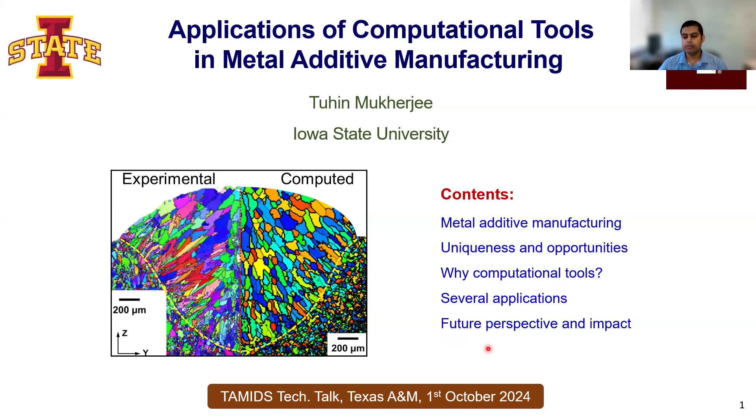This left-hand example, many of you may know. In 2014, in the International Space Station, they needed a wrench like this. But at that time, NASA didn't have any plan for a supplying mission. So what they did, they sent a 3D design of this wrench from Houston, Texas, very close to where you are sitting now, to the International Space Station. And in the International Space Station, they had a 3D printer that printed a fully functional wrench.

Even 10, 15 years ago, this could have been science fiction. But now, because of 3D printing, it's happening in reality. And if you see, the application of metal additive manufacturing is in diverse industries, starting from aerospace, consumer product, energy industry, medical industry, so on and so forth.

Then what is the problem that we are going to talk about today? The main problem is, if you are from metallurgy, you know that there are over 5,000 commercial metallic alloys. And how many of them can we print today? You can probably count with both of your hands. That few.

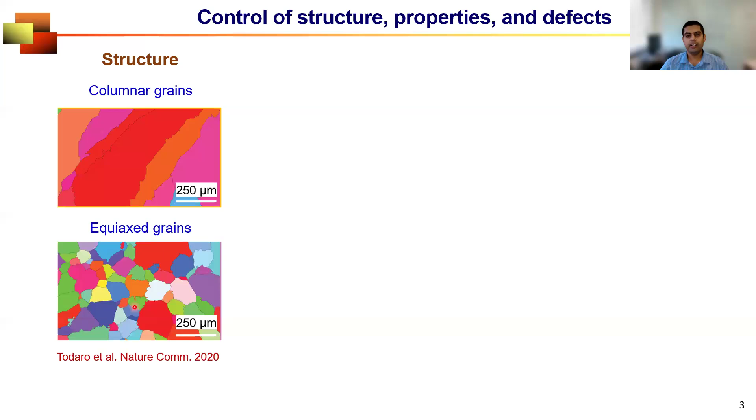When this kind of part is under tensile loading, two consecutive grains may start separating from each other, leading to failure of the part. But that's not the case when you have very small grains that will provide enough strength preventing failure. So you see that depending on how you are printing, your microstructure looks different, and that will result in very different mechanical properties. In the same part, depending on the location inside the part, the mechanical property can significantly vary.

For example, you see with the distance from the top of the deposit, the hardness varies significantly. And that is also attributed to the difference in the microstructure. And finally, a wide variety of defects—starting from lack of fusion voids, porosity, cracking, surface roughness, distortion, so on and so forth—all of these can significantly degrade the mechanical properties, serviceability, performance, and reliability of the part.

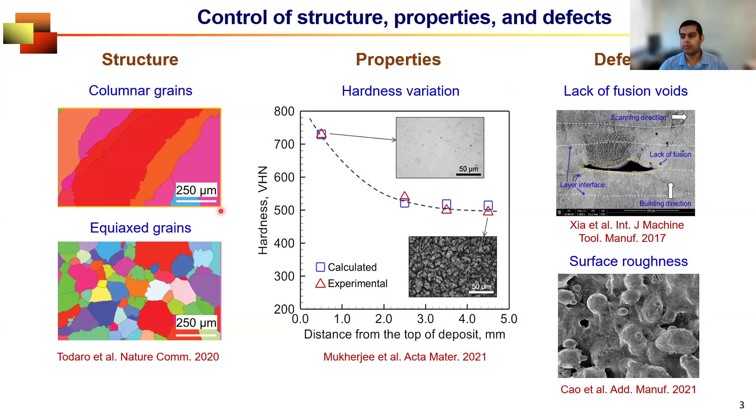And when we spend a lot of money in 3D printing a part by using a $1 million expensive equipment, then we do care about our part. We don't want to print and throw that part away. So that's why controlling all of these things is really, really important. And that's where the computational tools can help us.

Let me give you a quick example. If you do a metal 3D printing, these are the variables that you can adjust.

Like for example, power, speed, laser beam radius, layer thickness, and there are many variables that are process conditions or properties of materials. Now, there are 12 in this list, and if you use a very simple two-factor design of experiment, the minimum number of experiments that you need to fully capture the effects of all these variables is 2 to the power 12, which is 4096 experiments.

Now, if you do 3D printing, you know how challenging 3D printing experiments are. So let's assume that you do one successful experiment a day. A PhD student cannot graduate in 10 years.

So that's the issue. And if you just take two process parameters, laser power and scanning speed, you see for the same material, the power and scanning speed vary depending on which additive manufacturing process you are using. Please note that both of them are plotted in log scale. So that means you need to explore such a wide range of processing conditions to be able to fully explore the effect of processing conditions and to understand and correlate those with microstructure, properties, and defect formation.

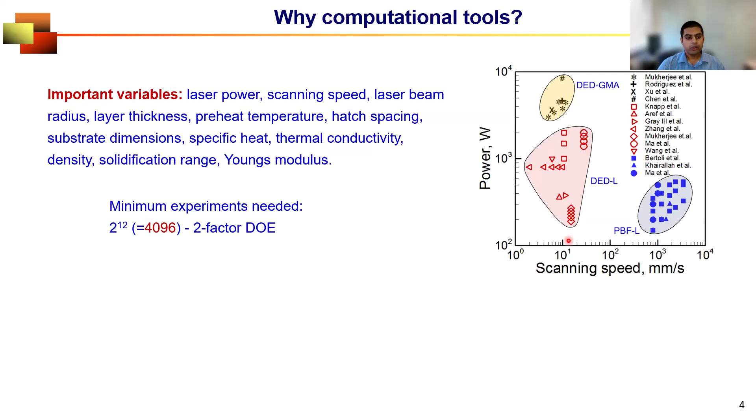To do so, we can take advantage of computational tools that can virtually test this process parameter window and reduce the parameter space for experiment. So it can tell what works and what does not work so that you don't waste material, energy, and time in doing experiments that are not fruitful. In other words, it will minimize trial and error, improve quality, and at the end, reduce money.

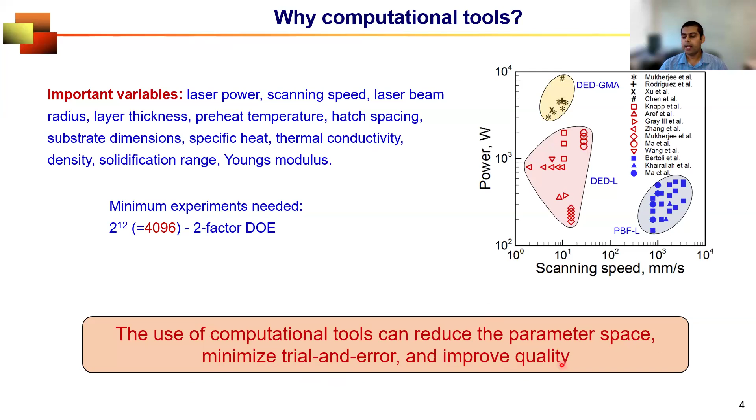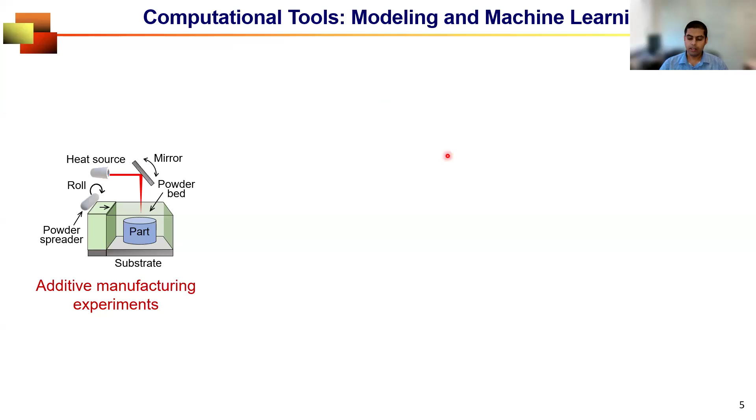So what do I mean by computational tool? It can include multiphysics modeling as well as AI tools such as machine learning and deep learning. So how do they help? Mechanistic modeling calculates the variables that affect the three things I was talking about by providing scientific insights. And it can guide experiments by providing the appropriate conditions for which we, let's say, get a defect-free part with appropriate microstructure and properties.

But development of these models depends on proper understanding of the science behind the additive manufacturing process. Now, additive manufacturing is a rapidly emerging process, and for many cases, we do not understand the physics completely. Then what we do is take advantage of the wealth of data that we generate every time we run the model or every time we do the experiment, and synthesize those using machine learning to obtain understanding that we cannot obtain

from mechanistic modeling. And these days, machine learning algorithms or deep learning algorithms have improved so much that they can provide reliable prediction with less data. And most importantly, since we are talking about a multivariable problem, machine learning can also guide us to understand which variable is less important, which variable is more important, so that engineers can know which variable to control to be able to tune microstructure, properties, and defects.

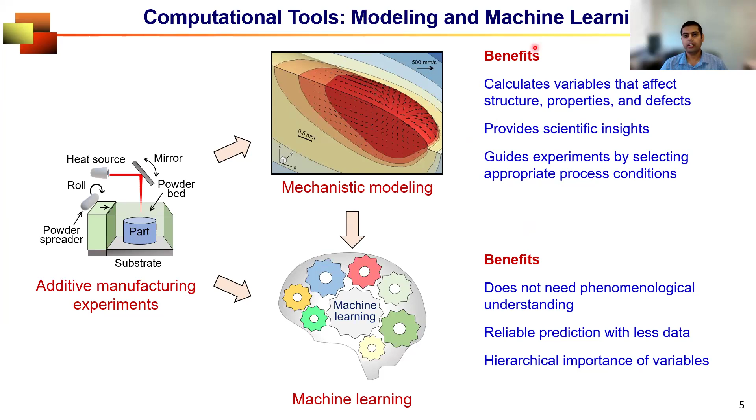So at Iowa State, we do a wide variety of things in both domains, modeling and machine learning. Let's start talking about the modeling. The most primitive model that we do is a reduced order analytical model. It has a lot of approximations to accelerate the computational speed, but it can give us essential information on which microstructure, property, and defect depend on, like, for example, the temperature distribution or the dimensions of the molten region.

So this is an example of laser-directed energy deposition additive manufacturing, where you see a very primitive reduced order analytical model can more or less predict the molten pool or deposit dimensions within

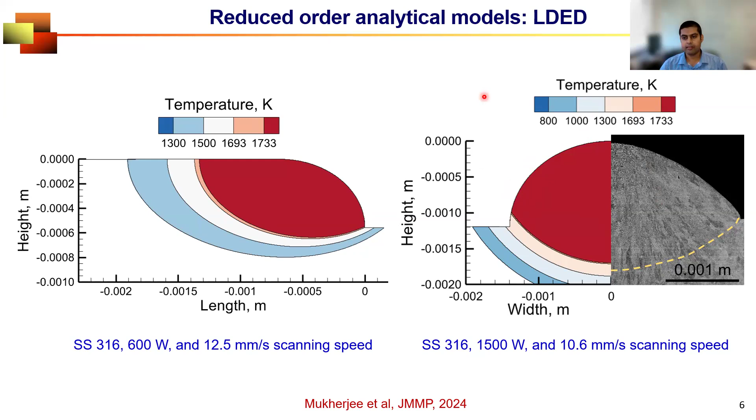So the advantage of these types of analytical models is they can not only provide useful insight into this process, but they can also be used for comparing different alloys in terms of their fusion zone geometry, cooling rate, evolution of microstructure, susceptibility to defects, printability, and so on and so forth.

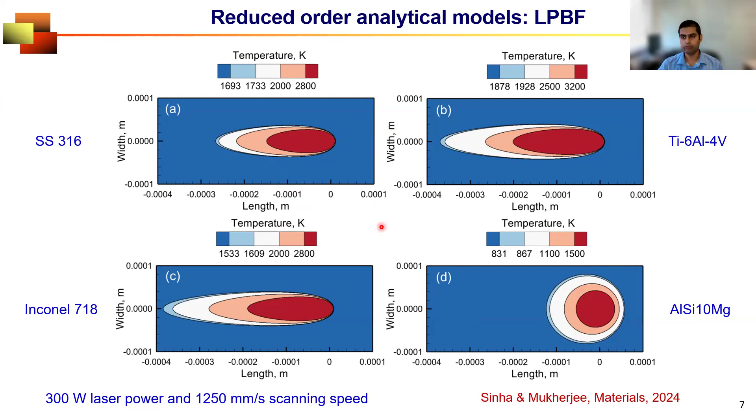Now, if we add a little more complexity and develop numerical models—why? When we need to understand more in-depth knowledge about the additive manufacturing process. For example, when we create a molten region, how does that molten metal flow inside that region? When we create a molten region, depending on the temperature difference, there will be differences in density and differences in surface tension. All of those drive the convective flow inside the molten region.

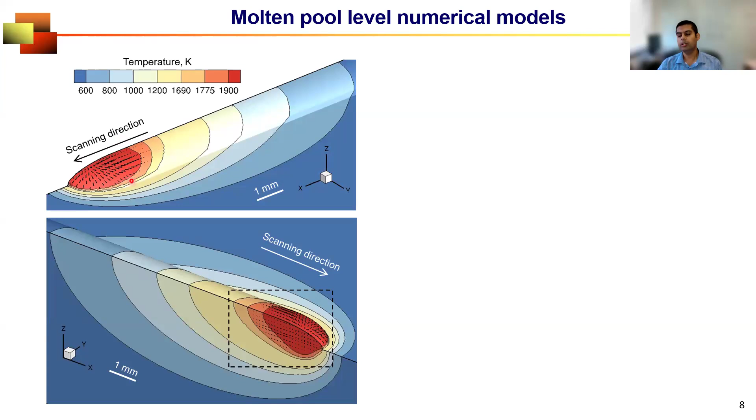These convective flows not only affect the dimension of the molten region, but the temperature in the nearby region, and thus the evolution of microstructure. This type of in-depth numerical model can provide us a very detailed picture of what's happening during the additive manufacturing process. If you look at the scale bar, this is 0.5 millimeter, meaning this is something like 5 millimeters long. So whatever is happening is within a very small, tiny domain, and we are capturing detailed physics within that tiny domain.

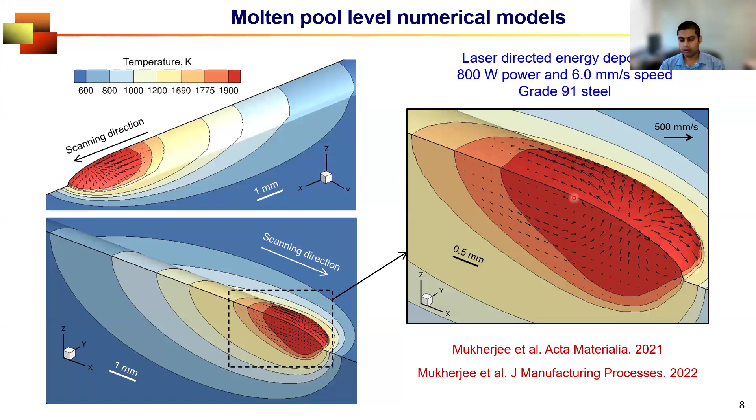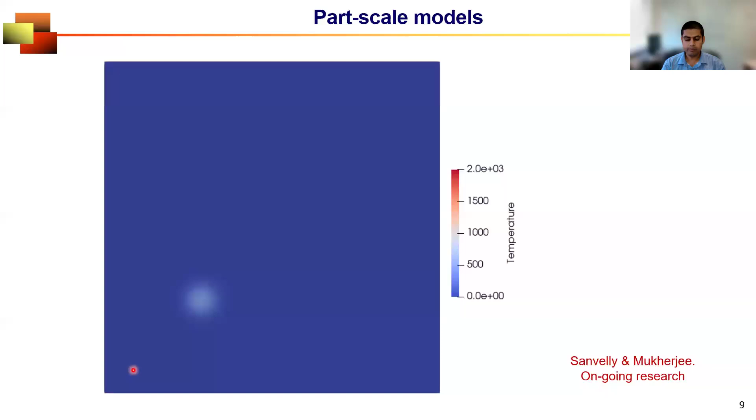Now, we know that we make additive manufacturing parts by depositing many layers and hatches, thousands of layers and hatches. So what if we want to simulate the entire part? That's often very difficult with such an in-depth model, for which we develop a part scale model that does not consider so much what's happening inside the molten pool, but is much more interested in looking at the entire picture. Let me play this animation so you understand what I'm saying.

For example, the laser beam in laser powder bed fusion is moving in a zigzag pattern, and this model is successfully capturing the variation in the temperature field happening across the entire part. That means for the entire part, depending on where we are looking, we can accurately predict the temperature fields and their spatiotemporal variations.

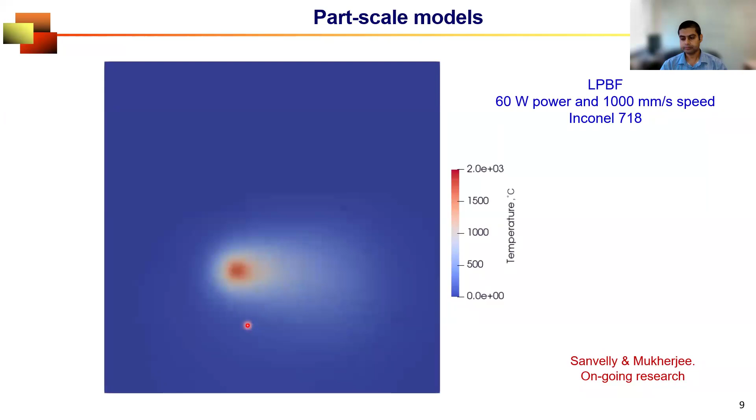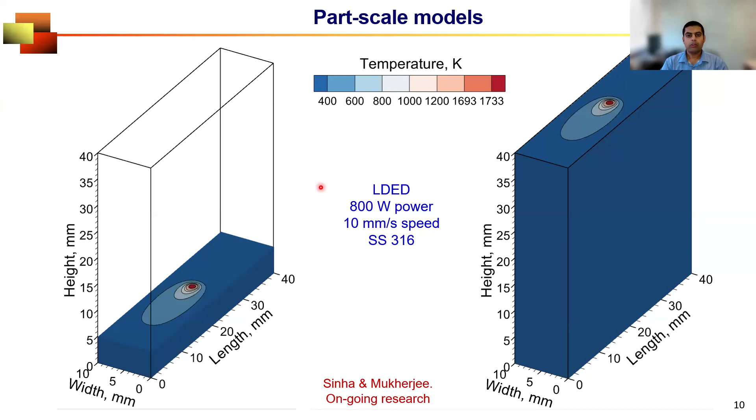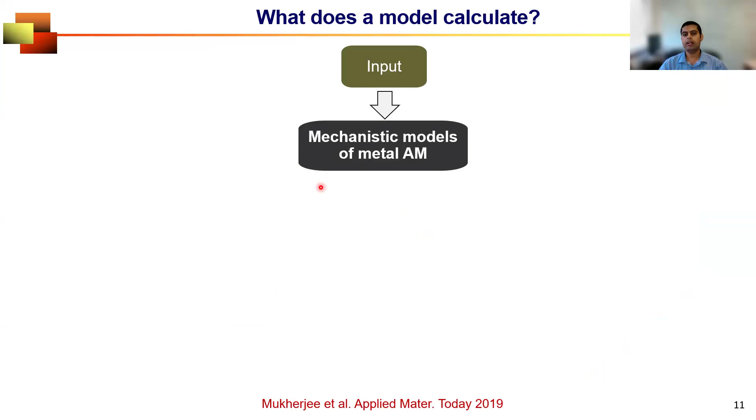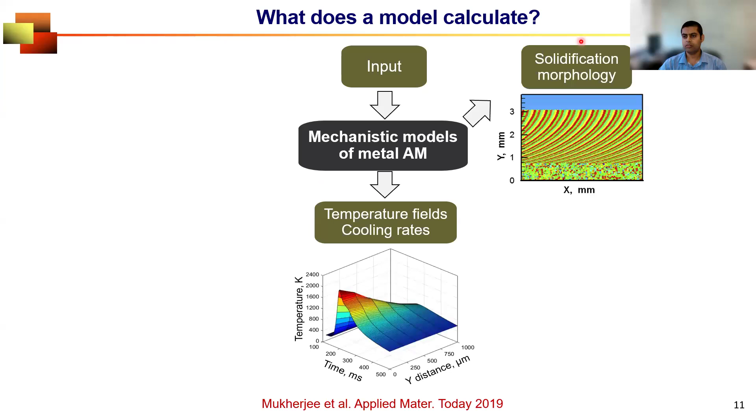So from the part scale model, if we go forward and try to understand the needs—whether it's a reduced order model, a much more in-depth numerical model, or a part scale model—the main objective is to get the temperature fields and cooling rates. Once we know those, we can take advantage of that information to get solidification morphology, whether columnar grains or equiaxed grains, or a complete 3D grain structure, not only giving you the grain size but its grain size distribution in 3 dimensions, and also residual stresses and a wide variety of defects. This is the overall objective and the main mantra of developing a wide variety of mechanistic models for additive manufacturing processes.

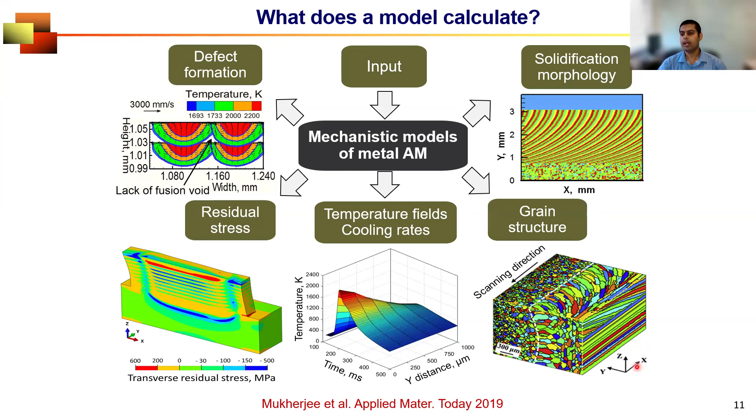Now, if we look at where machine learning can help in additive manufacturing, to me there are two types. Like all other machine learning applications, for additive manufacturing we can classify all the problems we want to address into two classes: regression problems and classification problems.

Under regression problems, the examples are like control of geometry—whether we are making a larger or smaller molten region, whether the grain size is very big or small because they affect properties, how much residual stress we are accumulating, what is the amount of distortion in those parts. Those are regression problems where we talk about the particular value of a variable.

In contrast, in classification problems we talk about 2 or multiple classes, like whether our part has a porosity defect or is defect free, whether it has a crack or is crack free, whether the solidification morphology is columnar or equiaxed. So it's a classification problem. Depending on these two types of problems, we use different machine learning algorithms, like any other application of machine learning.

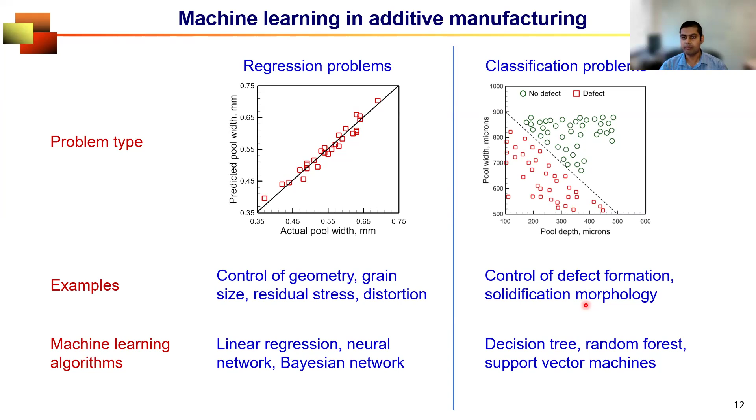So now, in subsequent slides, I'm going to give you 7 examples of the use of modeling and machine learning in additive manufacturing that we are doing at Iowa State.

This example is very close to my heart, and the picture I'm showing is actually in the building where I'm sitting, in my lab. We have a wire arc additive manufacturing system controlled by a cobot, or collaborative robot. What it does is deposit material in the form of wire, which is melted by a high energy electric arc—just like this, the electric arc is melting the metallic wire—and that is being deposited layer by layer, making the part in 3D.

This is my student wearing all the PPE, observing very closely what's happening in real time.

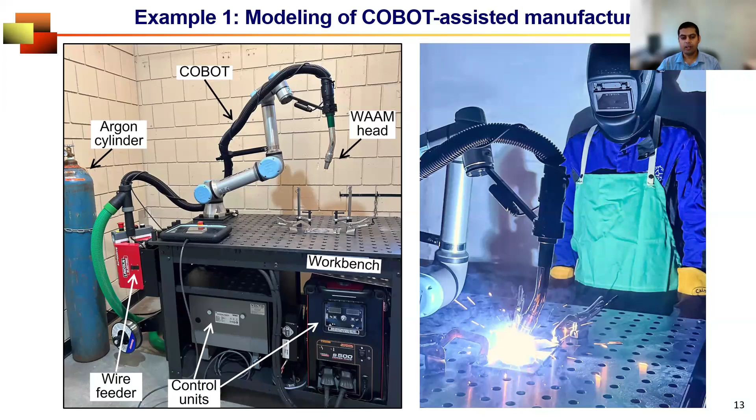Collaborative robot, or cobot, is much better than traditional robot in many cases. For example, it reduces the need for path programming, enhances the safety of human interaction, and improves user friendliness and productivity. Because of these, it's particularly useful for additive manufacturing.

As you see my student doing, you do not need to program this robot explicitly. Instead, you can teach the robot a path along which you want to deposit material by selecting a few important coordinates, and the robot itself will identify the deposition path and 3D print the entire part.

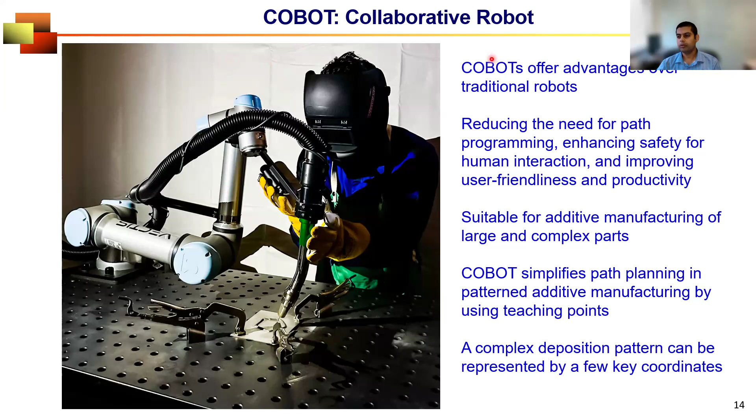Here we model the additive manufacturing process using a collaborative robot. I can give you one quick example: we deposit material following a hexagonal pattern, and the cobot needs to be programmed just based on the 6 vertices of this hexagon.

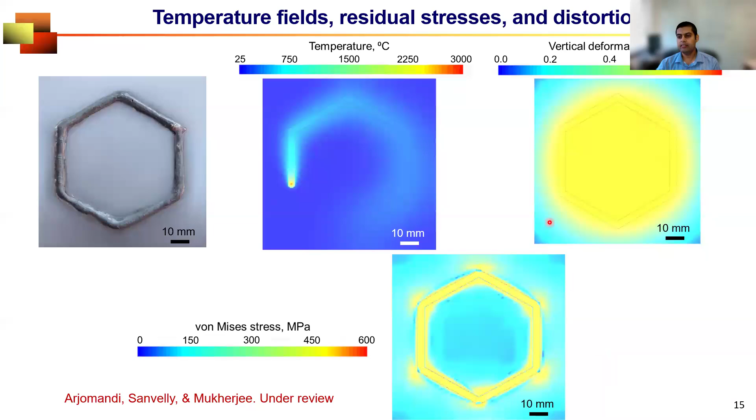You can see the corresponding temperature calculation using a part scale model, the deformation calculation, and stress calculation, all using part scale model because here we are talking about large length scale. The part scale model gives you the essence of the process itself, where the stresses are accumulating the most, how the part is distorting in 3D, all those detailed information.

The second example is consistent with one of our objectives: structure, property, and defects. It's on controlling grain structure. If we go back to our metallurgy class, we are taught that during solidification of an alloy, there is a two-phase region, solid liquid region. When the liquid is being solidified, not all liquid instantaneously becomes solid; there is a two-phase region, liquid and solid.

If you plot the temperature in that region, you will see two things: one is actual liquidus line, and the other is the equilibrium liquidus line. The difference between these two is called supercooling. For all solidification processes to happen, there has to be a supercooling that drives the solidification process.

This temperature difference is very important, because this temperature difference divided by distance, called temperature gradient, represents whether we will form columnar grains or equiaxed grains. This is a very well-known plot from metallurgy books, where people plot this temperature gradient, which is temperature difference divided by distance, the slope of this line, with respect to growth rate. Growth rate means how fast this solidification front is moving, the rate of solidification.

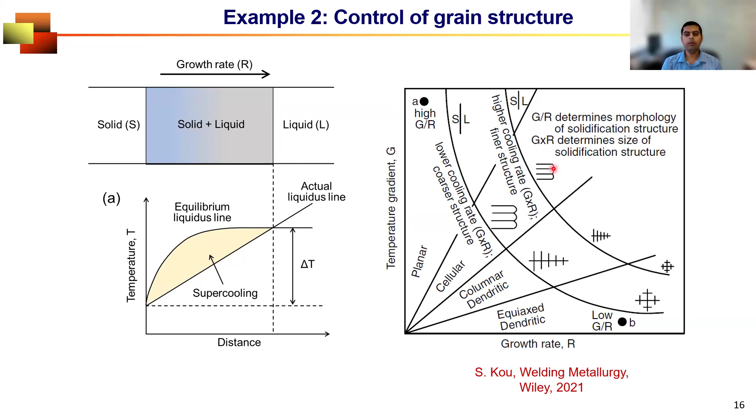Now let me give you examples of both of these. Here we have used a model to calculate the G by R ratio for an aluminum alloy, 6000 series aluminum alloy. The calculation shows that this G by R ratio, which is the slope of the previous plot, is varying spatially like this.

We know for this material there is a critical G by R value that determines whether it will form columnar grains or equiaxed grains. For example, if the G by R ratio is more than 9, it will form columnar grains. If this is less than 9, it will form equiaxed grains.

Now you see this is the computed value of G by R. In this region, the value is less than 9, and they should form equiaxed grain, which is proven here from the model as well as from the experiment. Beyond which, the value is more than 9, meaning columnar grain. You see long columnar grains being formed, which is also evident from the experiment.

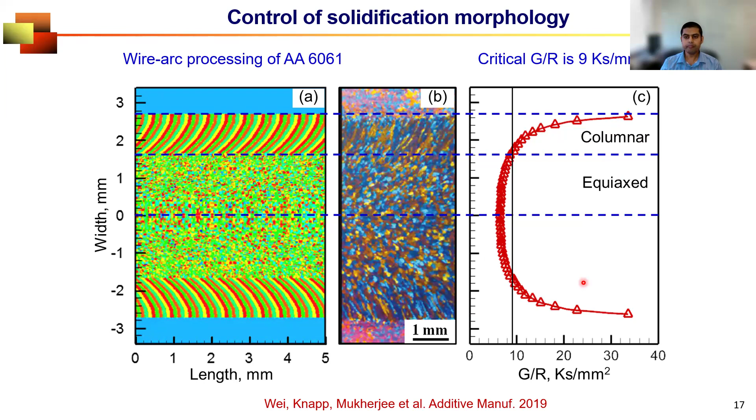This gives you a very good example of how you can take advantage of temperature calculation and process it to get useful scientific insight to predict microstructure. So this is about the morphology. The next thing is about the size.

If I go back once again to our phase transformation class, we often talk about primary dendrites and secondary dendrites. For non-metallurgists, they look like Christmas trees, but that's how solidification happens. The distance between two consecutive primary dendrite arms, or between two consecutive secondary dendrite arms, significantly contributes to the mechanical properties of the part.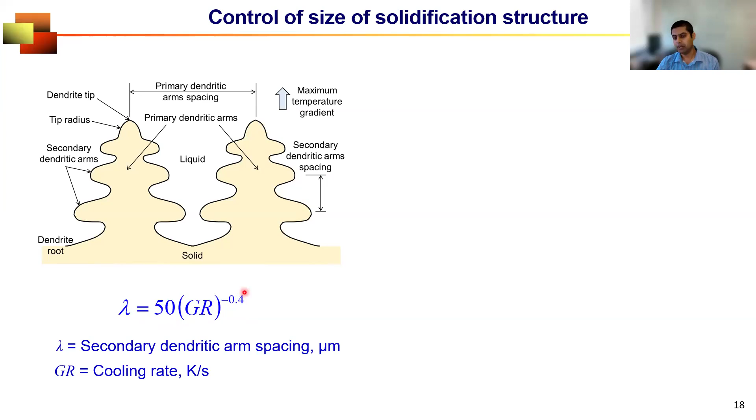Secondary dendritic arm spacing, which is this distance, is related to the cooling rate using this formula. Now 50 and 0.4 are alloy specific constants. For steel, this is 50 and 0.4. If you are taking aluminum alloy or nickel alloy, they might be different.

So once you have these and calculate the cooling rate from the temperature field, you can calculate secondary dendritic arm spacing. You see here for different laser powers how we can calculate the secondary dendritic arm spacing that is matching with the experiment. For low power, you see smaller dendrites, and for high power, you see larger dendrites, which is very consistent with the calculated results.

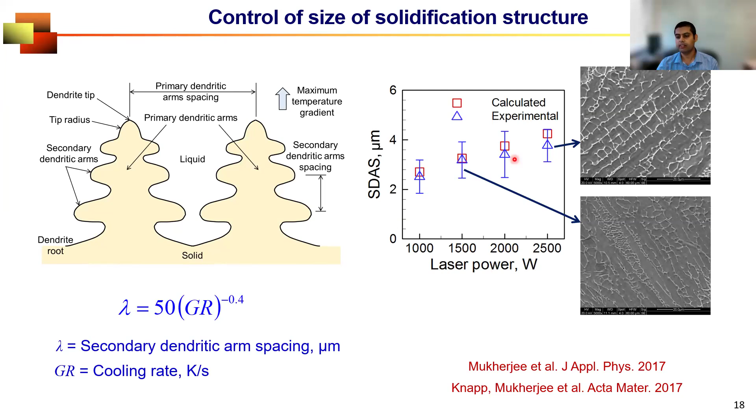So now, since we have talked about the microstructure, the next example that I selected is for controlling one of the very primitive mechanical properties, which is hardness. The example is for a ferritic steel whose hardness is affected by martensite.

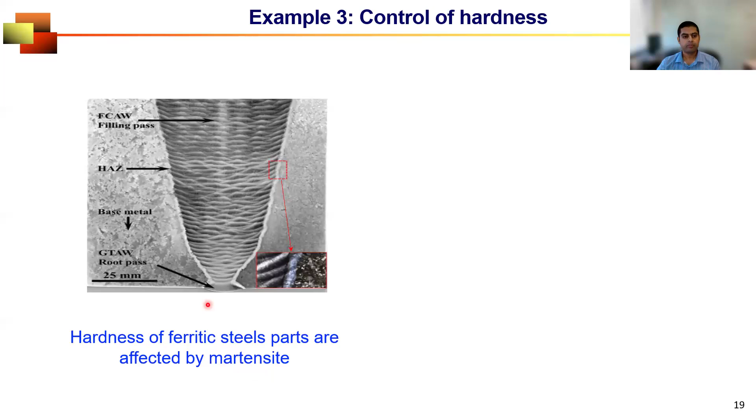Often we weld or additive manufacture this type of part by using multiple tracks. Here we are talking about a ferritic steel, grade 91, that is used for the nuclear power industry. This is a famous transformation diagram.

You can see that martensite forms for this particular material at a very low cooling rate, 0.05 Kelvin per second. In additive manufacturing, what is the cooling rate? It's like 10 to the power 3 to 10 to the power 5 Kelvin per second, depending on processing conditions. So this is guaranteed that whenever you process this material using additive manufacturing, you will end up having martensite. And this martensite will control the hardness of the part.

But there is a small catch. We make additive manufacturing parts by depositing many layers. That means the layers already deposited will undergo repeated heating and cooling. And that repeated heating and cooling changes some of the martensite to tempered martensite. Hardness of tempered martensite is less than martensite.

So that means depending on how many times it's getting reheated and cooled, the extent of tempered martensite formation will be dependent on that, and hardness will accordingly change. So how to model that?

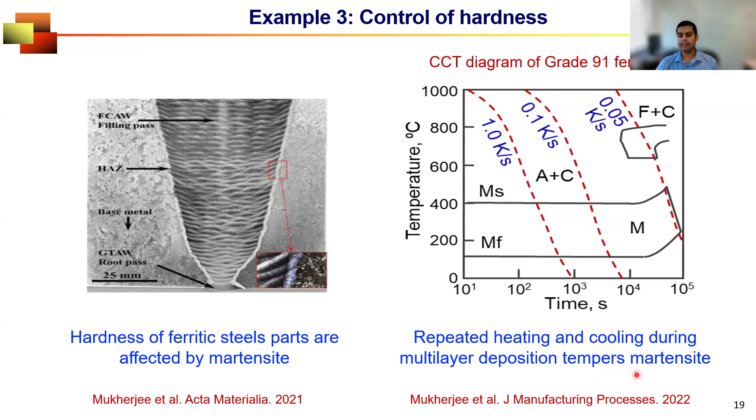What we did, we used the isothermal aging data. Now, for a complex material system like grade 91, it's very difficult to get reliable data on isothermal aging. So what we did, we collected a lot of data from the literature and then used that data to train a neural network, and then used that neural network to generate a lot of tempering data for different time and temperature combinations.

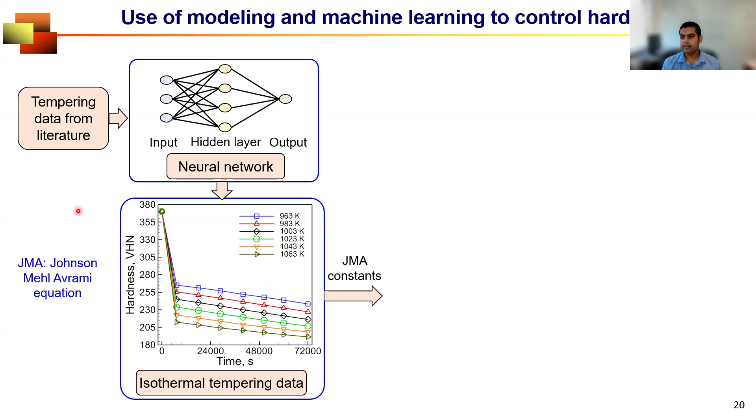Once we have that, we get the constants in the Johnson-Mehl-Avrami equation. What's this equation? It's a very famous equation for capturing isothermal phase transformation. On the other hand, the model I was talking about can give you the temperature variations with time, multiple thermal cycles, repeated heating and cooling due to deposition of multiple layers and tracks. Now, the JMA equation is an isothermal phase transformation equation.

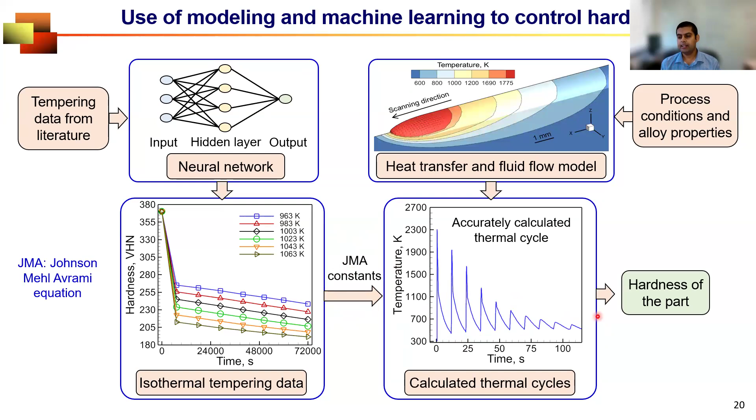So what we need to do is take that and integrate over the temperature variation with time. And that will give us the tempering kinetics as well as the hardness of the part. And it looks like this.

Hardness is plotted for grade 91 steel part made by laser directed energy deposition with respect to the distance from the substrate. You can see that near the top, the hardness does not vary significantly, but down below, it varies linearly with the distance. This phenomena, observed both in experiment and in calculation, can be explained by using the model.

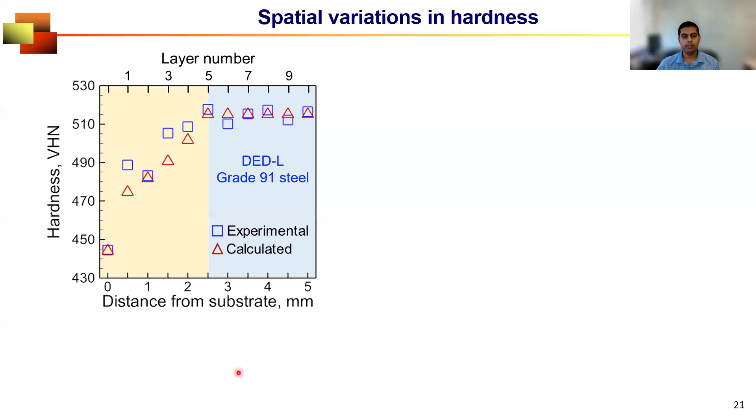For example, near the bottom region, you see that the peak temperature is going below the AC1 temperature. What is the AC1 temperature? AC1 temperature denotes the region between austenite and martensite. So if you think of the phase diagram of steel, that's the important temperature we often talk about. The transformation from austenite to martensite will be valid only if the temperature is below this AC1 temperature.

But you see, for this case, for the first 4 cycles, whatever martensite it forms goes back to austenite because the temperature goes beyond 1100 degrees Kelvin. But after some time, the peak temperature is not going beyond AC1 temperature, and whatever martensite it forms undergoes repeated heating and cooling, and that martensite transforms into tempered martensite. That's why the hardness is less than in the top region.

What's happening in the top region? The peak temperature never goes below AC1 temperature. So the martensite that forms here will transform again back to austenite. This martensite will never transform into tempered martensite. That's why the hardness in this region is controlled by the absolute amount of martensite, not tempered martensite.

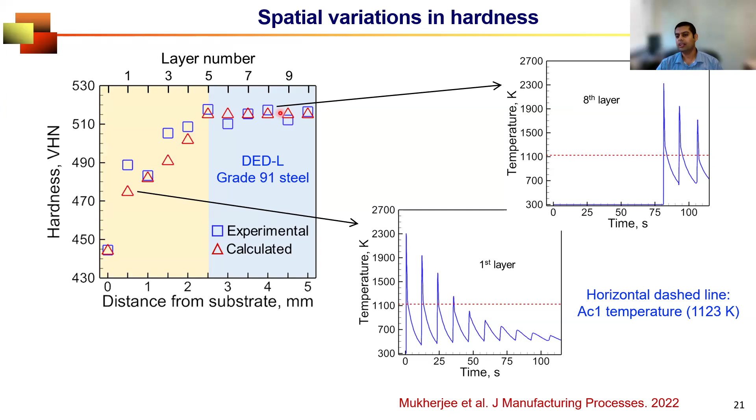So the fourth example, after structure and mechanical property, now we are going to the defects. Examples 4, 5, 6, and 7 will be focusing on defects, different types of defects.

So the first one is reducing porosity. There are 3 different types of porosities that we encounter during the additive manufacturing process.

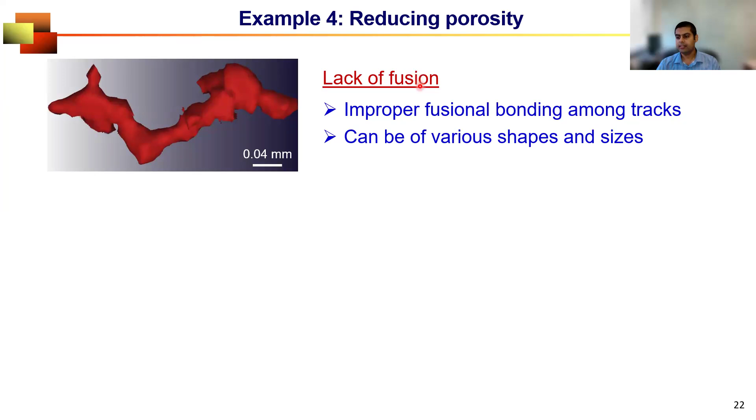First one is lack of fusion. What do I mean by that? We deposit multiple tracks. What if they do not properly fuse with each other? That will end up creating a lack of fusion defect.

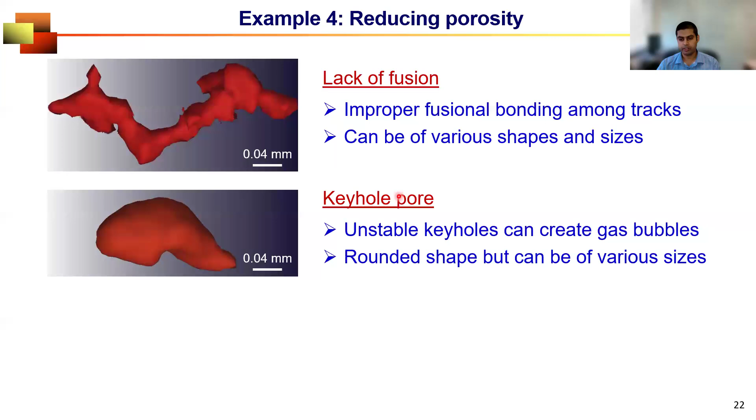Second, often we perform additive manufacturing in keyhole mode. What do I mean by that? The energy density is so high that it forms a vapor cavity during the process. If that vapor cavity or keyhole is unstable, that will break and generate a lot of gas bubbles that will end up creating porosities. The third one is gas porosity, where the shielding gas or metal vapor are trapped within the molten region and create porosity.

You can see they vary widely in terms of their shape, size, and morphology. So here I'm going to talk about lack of fusion and gas porosity.

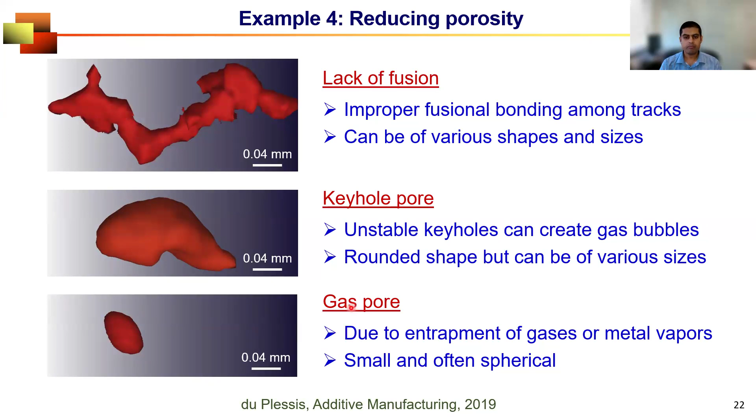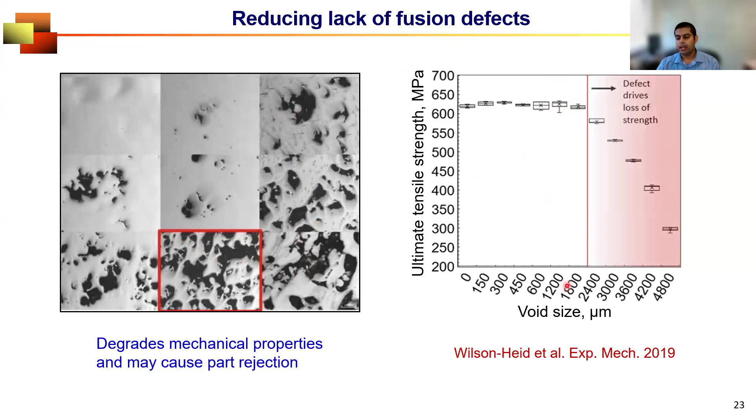So like all three types of porosity defects, the lack of fusion defect, which is represented by improper fusion among tracks, significantly deteriorates the mechanical properties. As you can see, the ultimate tensile strength decreases very rapidly with the size of the void.

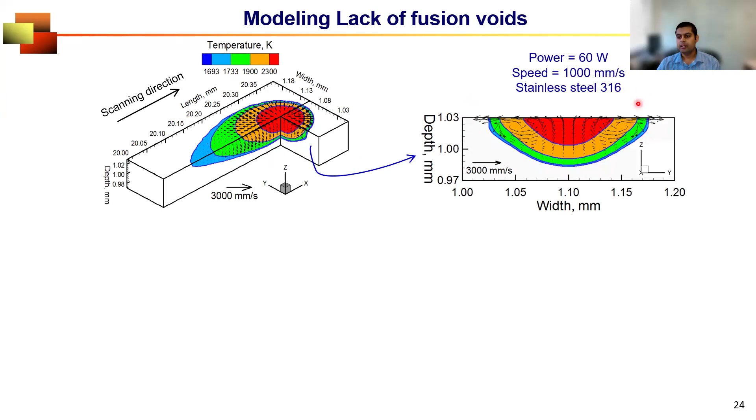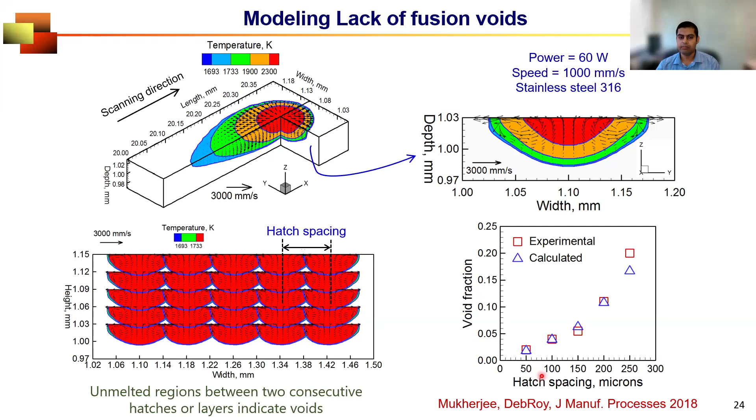Now, if you have all these variables calculated using an additive manufacturing model, we can even get a linear regression model and propose an index that can delineate between porosity cases and cases where the porosity is very low. That's the advantage of combining modeling and machine learning, to identify important scientific insights to solve such a complex problem like porosity defect in additive manufacturing.

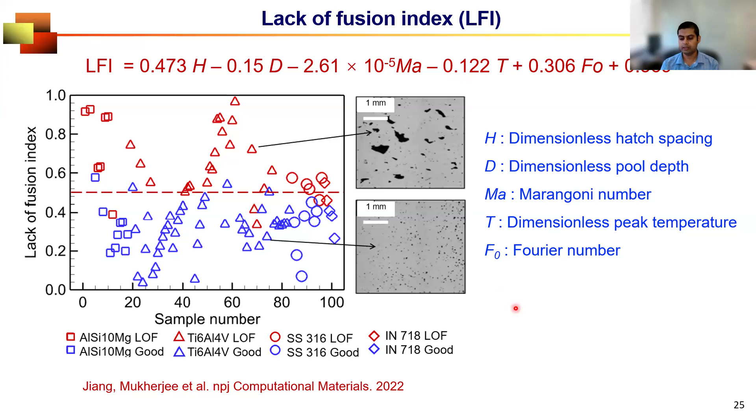So the other type of porosity is called gas porosity. Now, there are two times that are important: time to rise, and time to solidify.

What are they? Let's imagine this is the molten region and we have a gas bubble. Now, this gas bubble, since its density is less than the density of liquid, because of buoyancy, this gas bubble will try to float up, rise up. Now, before it can rise up and escape from the molten pool, if the molten pool solidifies, then it will be trapped and cause porosity.

So then the time it takes to rise up, time to rise, and the time the molten pool takes to solidify, both are important. If time to rise is significantly higher than time to solidify, then definitely you are going to form porosity.

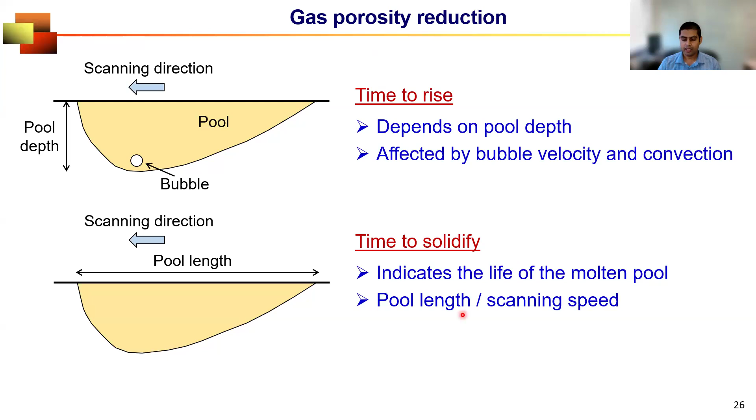So what we did, we tried to calculate these 2 times in additive manufacturing and tried to come up with their ratio, and propose a dimensionless index. What we found?

Depending on the index, we can classify the cases where we see porosities and the cases where we do not see porosity. We have about 100 experimental cases for 4 different commonly used materials, and these 100 data points are collected from the literature, different papers that are available.

And we see that no matter what process parameters we are using, at the end, a simple time ratio can delineate the defect-free cases from the defective cases. And when we have a defect, the index is also useful to represent the density, or 1 minus porosity, very accurately. So here, this is another great example where a simple temperature field and molten pool dimension calculation can give you important insight to solve very important problems.

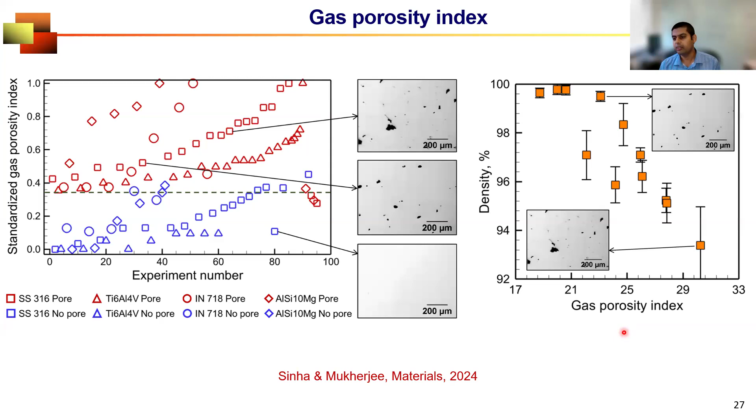Okay, the next example is minimizing residual stress and distortion. I think residual stress and distortion are the two most important problems in additive manufacturing, because we try to print dimensionally accurate complex parts, and we don't want our part to distort.

So what we did: we start from temperature field calculation, and then take that temperature field along with the geometry and mesh into a mechanical model, a finite element based mechanical model, and calculate residual stress and distortion.

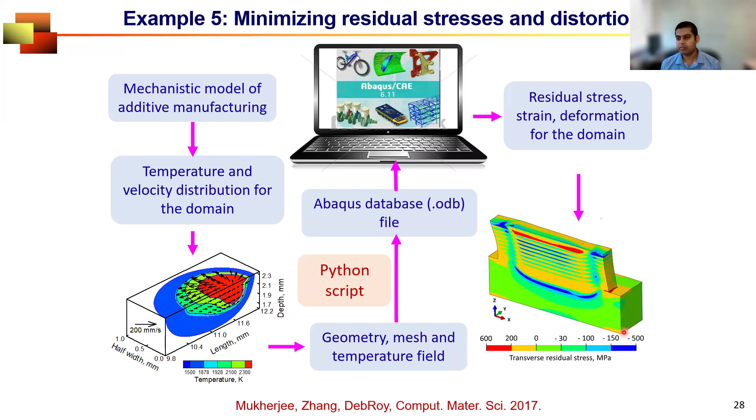That type of modeling framework is enormously useful to provide scientific insights. For example, you see how the distortion or deformation field evolves depending on the temperature. This is the temperature field, and this is the deformation field. Where the temperature is very high, the deformation is also high. Why? This is alpha delta T, high school physics. As the molten pool progresses, this deformation field also gets elongated.

So this information is very useful to find out how much deformation you can get in the final part, and whether it exceeds the allowable design limit.

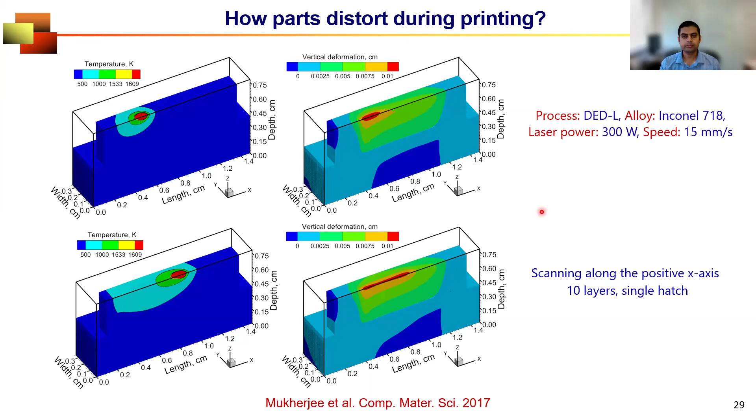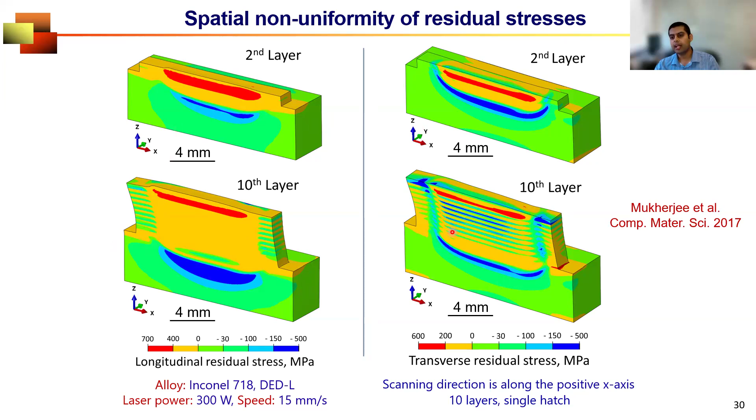Similarly, for residual stress, we can get the spatial distribution of residual stresses - how the high residual stresses accumulated after deposition of the second layer are partially alleviated when you deposit a subsequent layer and reheat and recool it, and how residual stress is spatially so non-uniform, causing delamination, cracking, and many other problems in additive manufacturing, and how numerical models can capture all of these elements and guide engineers to overcome these problems.

Now, going back to one of the primary advantages of using machine learning - identifying the relative importance of important variables. What we did: we identified 5 physical factors that control or affect residual stress formation, and we created a database of 243 data points for 3 very commonly used alloys.

What we found: delta T, which is the difference between solidus and preheat temperature, is the most important variable controlling residual stress. Going back to welding literature 40 or 50 years ago, we see that in the welding industry, it's very common to preheat the welding plate before welding. What they are doing is increasing this T-preheat to minimize delta T, to minimize residual stress.

So you see, using modeling results and then teaching machine learning algorithms using those modeling results, we are finding science that is already known in the welding industry for a long time. These computational tools are enormously advantageous to give you insights already proven for a long time in various industries, but at the same time, discovering new science moving forward and helping us solve important problems in metal additive manufacturing.

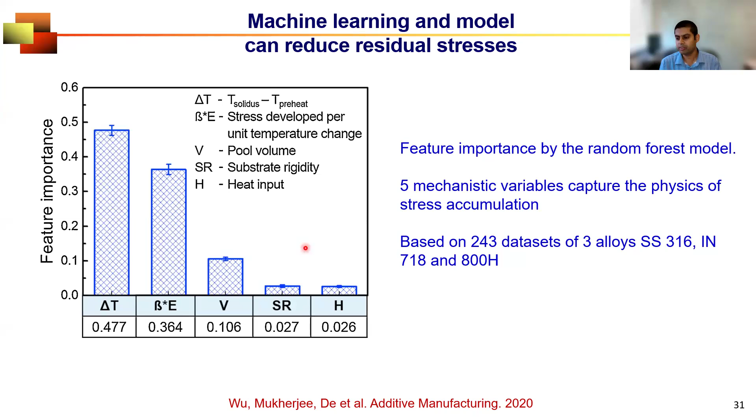Sixth example. When we do additive manufacturing, we are talking about a high temperature process. Just imagine the molten region as your coffee cup - water vapor, water molecules evaporate from the top surface of the coffee cup. A similar thing happens for a molten pool: the alloying elements vaporize from the molten region, and at the end, the chemical composition of the part is significantly different from the material you started with.

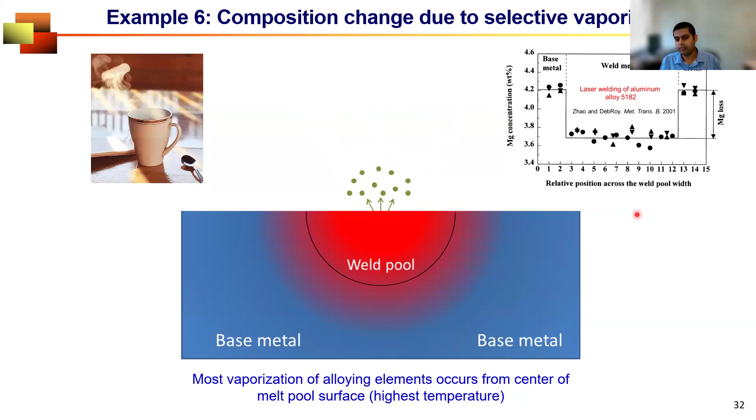For example, this is an example of welding aluminum alloy, 5000 series. Magnesium is one of the prominent alloying elements for 5000 series aluminum alloy, and because of evaporation, there is a depletion of magnesium concentration. What does it do? It not only changes the composition, but also changes the microstructure and mechanical properties. And if you are talking about stainless steels, it also affects the corrosion resistance. So all important properties related to serviceability, reliability, and performance are affected by this.

This paper just became available online yesterday in NPJ Computational Materials. What we did: once again, we started from basic temperature calculation, and then we know the vapor pressure versus temperature relation, which is a material property. For different elements we see different plots. It does not depend on whether it's additive manufacturing or welding - it's a material property. Based on this relation and the calculated temperature field, we get the vapor pressure distribution.

In an alloy, we have different compositions of these alloying elements. Depending on that, they have different thermodynamic activity. So thermodynamic activity and vapor pressure give you the partial vapor pressure, which is responsible for evaporation.

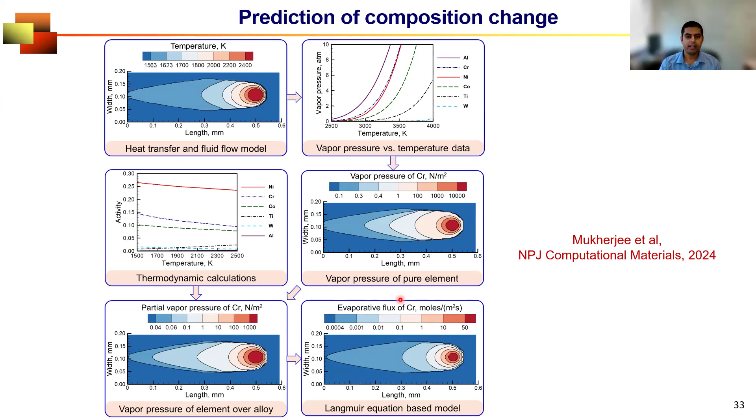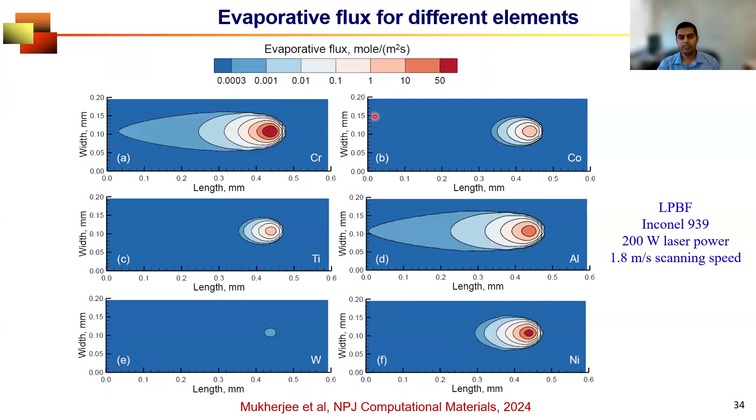Once we can calculate the evaporative flux of individual elements, we can calculate the final composition change. For a nickel-based superalloy that consists of many elements like chromium, cobalt, titanium, aluminum, nickel, and tungsten, we can calculate their evaporative fluxes. Depending on the relative difference of evaporative fluxes, we can find out the composition change, which is very consistent with the experiments we performed for a wide variety of elements.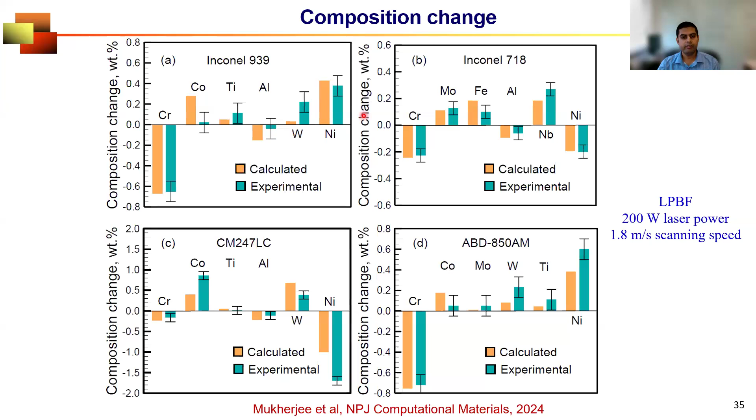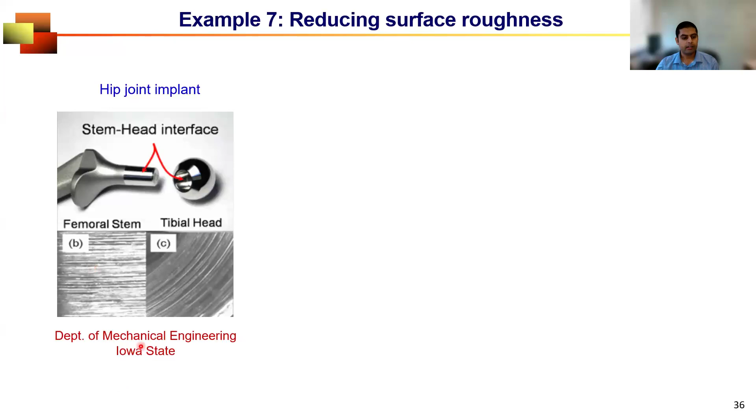The last example I have is reduction in surface roughness. Why is surface roughness important? We talk about additive manufacturing of very complex parts where dimensional tolerance is important, like this implant from our department, or a bone implant that looks like this.

One way to achieve good surface roughness is to use very thin layers. In additive manufacturing, we use layers thinner than human hair. If you reduce the layer thickness, even slightly, you should be able to reduce the roughness. But if you print with very thin layers, you slow down productivity. It will take more time. So there has to be a trade-off.

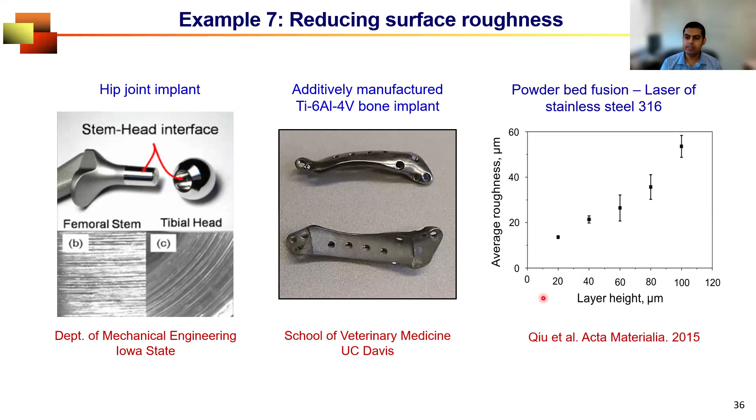To achieve that trade-off, we need modeling and machine learning. We identified scientifically why surface roughness forms, and came up with three different factors: a geometric factor about how tracks are deposited, an instability factor about whether the molten pool is continuous or discontinuous, and whether the molten pool will be uniform or disintegrated into small balls, creating surface roughness.

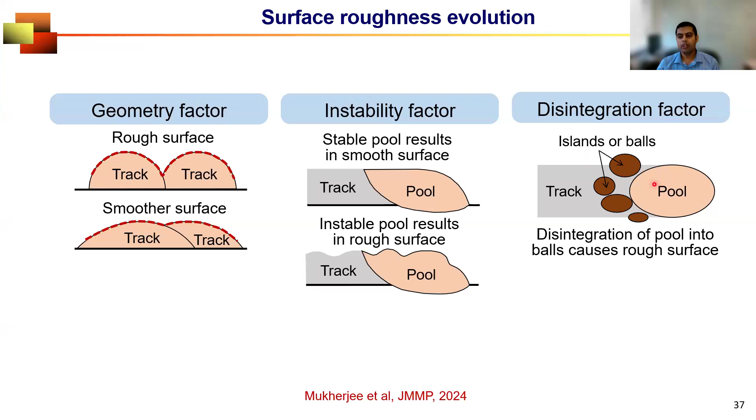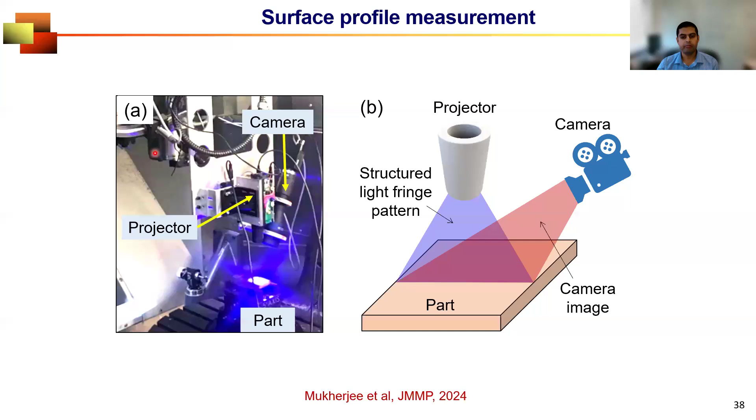We calculated all these things, and in parallel we also measured the surface roughness using a surface measurement method on this campus. Then we got the entire picture of the surface profile representing the surface roughness. This is the printed part, this is the top surface, and within this region we did the surface measurement using optical scanning to get the surface topography.

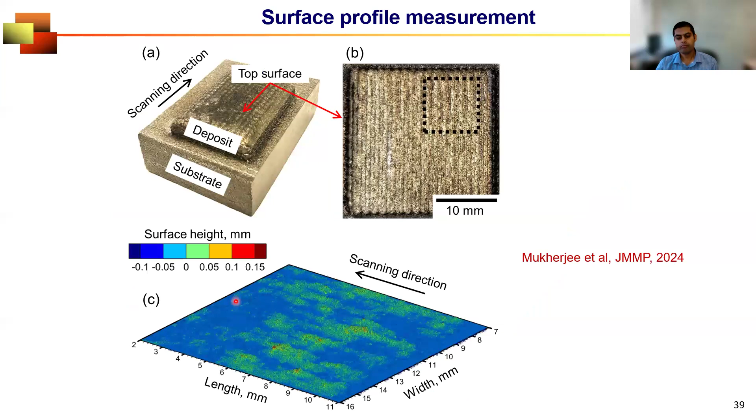This surface topography data was correlated with the index we proposed, a dimensionless surface quality number based on those three scientific factors. We accurately came up with a process map that guides engineers on how rough the surface will be. For example, here the x-axis is heat input, y-axis is powder mass flow rate. If we deposit more powder for the same heat input, the surface becomes rougher, very intuitive. Or for the same mass deposition rate, if we increase the heat input, we create non-uniformity and increase surface roughness.

So a higher surface quality number represents a rougher surface. Two experimental cases, B and C: C has a higher surface quality number, creating a rougher surface. This is an example of how you can use modeling, and these results come from a reduced order model. These calculations are very rapid but still give you understanding of the surface roughness and how to control it.

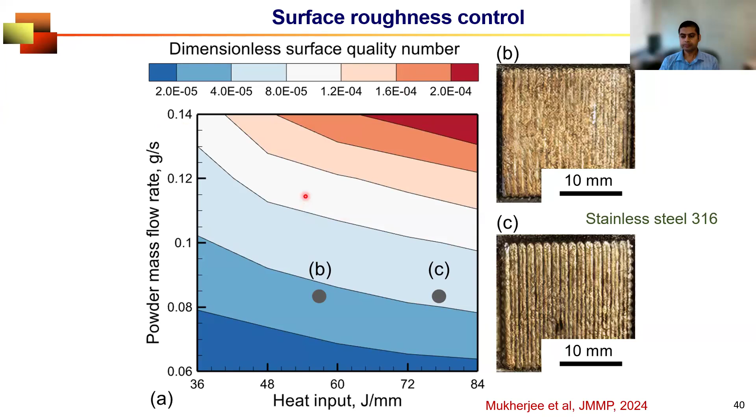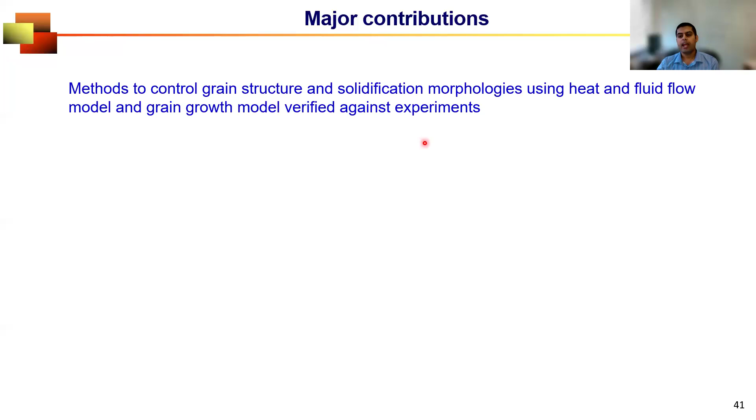So closing the deal, what are the major contributions of using modeling alone, machine learning alone, or sometimes combining both? First, we have methods to control grain structure, solidification morphologies, and other microstructure attributes. Since we can control microstructure, we can provide insight about the spatial inhomogeneity of mechanical properties, which is a characteristic of additive manufacturing parts, and how to reduce that.

We've talked about four defects, but there's no limit. We can use similar methodology to minimize all common defects in additive manufacturing. Summing up, this technique of using computational tools can not only provide improved scientific understanding of the evolution of microstructure, properties, and defects, but also give us methods to control them.

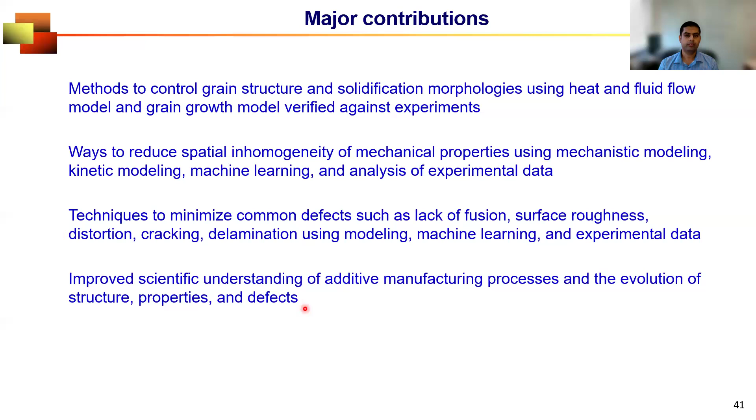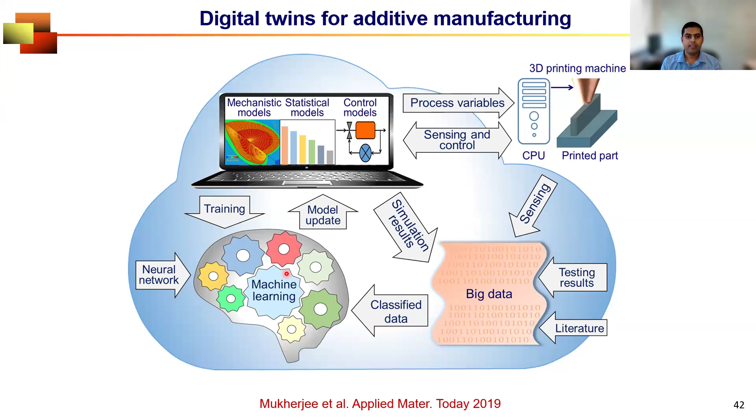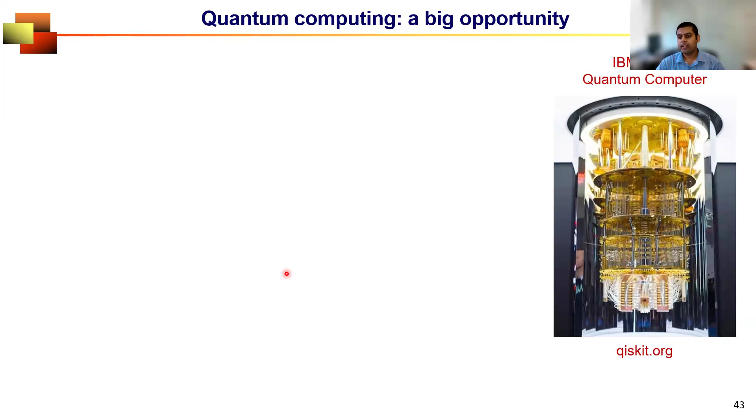The second example I think will be the future is the use of quantum computing. Why? We're talking about challenging computing technologies like numerical models and part-scale models that need heavy computation, and what else can help you more than a quantum computer? If you go to this link, IBM states, and I'm quoting from IBM's website, that quantum computing will disrupt and redefine manufacturing. And SBIR, Small Business Innovation Research in the US, which funds small business initiatives in this country, has also recently emphasized the importance of quantum computing in 3D printing.

So these two examples tell us that's the future. Use of quantum computing is the future for the growth of additive manufacturing, especially when we consider the use of computational tools.